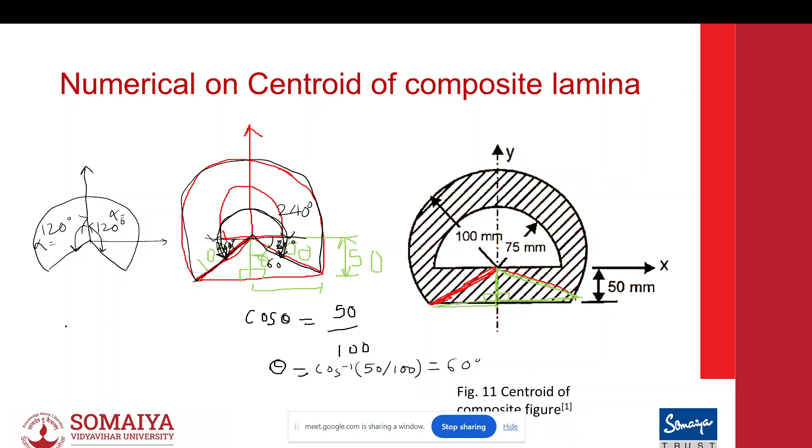So now you go to the notes where we have drawn some basic shapes. You will find a figure like this, which is a sector of circle, which is symmetrical about the x-axis.

What is the area for this sector of circle? R square alpha, where alpha should be in radians. So if we apply the same analogy, this is the sector of circle. What can we find out the area of this?

Let us call this as A1, these two triangles or single triangle as A2, and this as A3. So what we can do: A1 plus A2 minus A3. For that, we need to find out A1.

To find out A1, we need to find out R square alpha. We have the alpha now, 120 degree. And now our R is what? R is the radius, this radius.

Now the big question is, this is a sector of circle which is symmetrical about the x-axis. Can we apply the same analogy here? If it is yes, then we can proceed with the process.

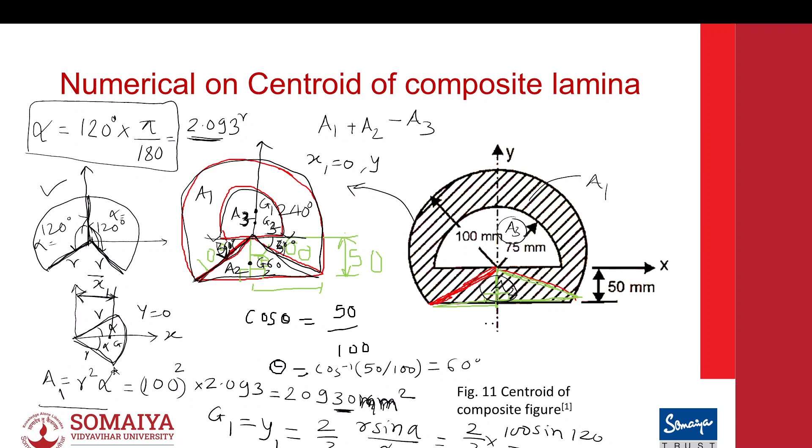Now done, okay, now you draw the table. So in the table, what do you write? Figure, area, xi, yi. Or part, area, right? Then don't write down xi, no need, because xi is symmetrical, so zero. Just write down coordinates in y, and that in mm. And then ai, yi is in square.

Sorry, cube, because ai is in square and yi multiplied will be cube. Area will be square, right? So now first will be sector, right? Second is triangle, A1, A2. And the next one will be semicircle, A3.

Babu? Wait, huh? Yes, please.

Yes, sir, done. Now we can write down the value of area we have got, 20930. Yes, done. Then we can also write down the 27.584 here. Yes, barabar, yi, na? Yi. Now triangle.

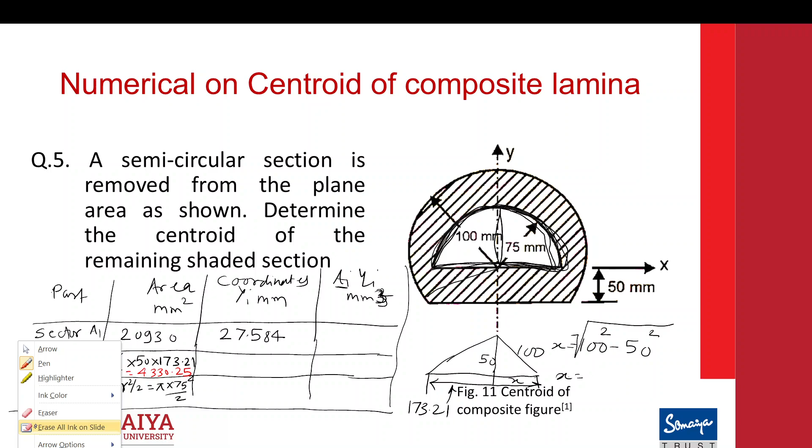Calculator you are using, na? Yes, calculator only. Because I'm using mobile calculator, na, so it might give some higher values. Yeah, barabar, better proceed.

Now coordinates of y1 for triangle, coordinates of y2 for triangle. Okay, now this is the centroid. Yes, barabar, here it is. And the height is 50, na? Okay, so what will be the distance from there to there? Right, barabar, okay.

Triangle, kind of problem. Yeah, wait. My daughter disconnected the charger. She's crying. Don't worry.

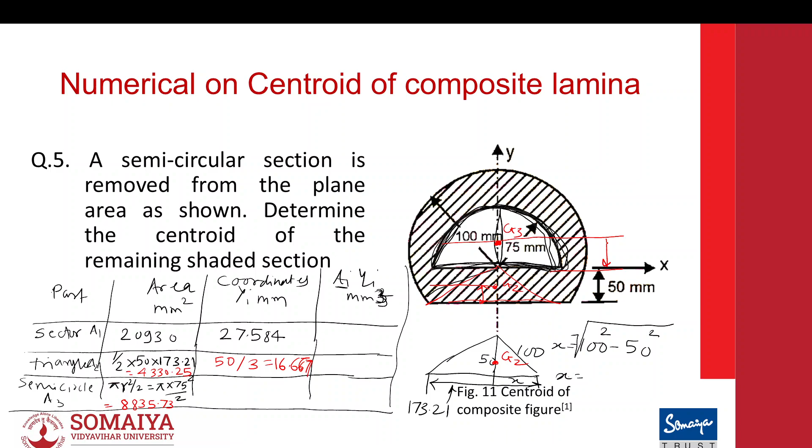4 into r, which is 4r by 3 pi. So r value is... the whole value we are taking now. But tell me, what is r? It should be 100, right sir? No, now we are focusing on the semicircle.

Semicircle, oh right, sorry, 75 then. That's why I have not written it here. 75. So 4 into 75 by 3 into pi, right, 4 into 75 divided by 3 pi.

Wrong. 21. 31.84, plus or minus? Minus. Plus. It's a semicircle right sir, we are minusing, right? But the area we are subtracting.

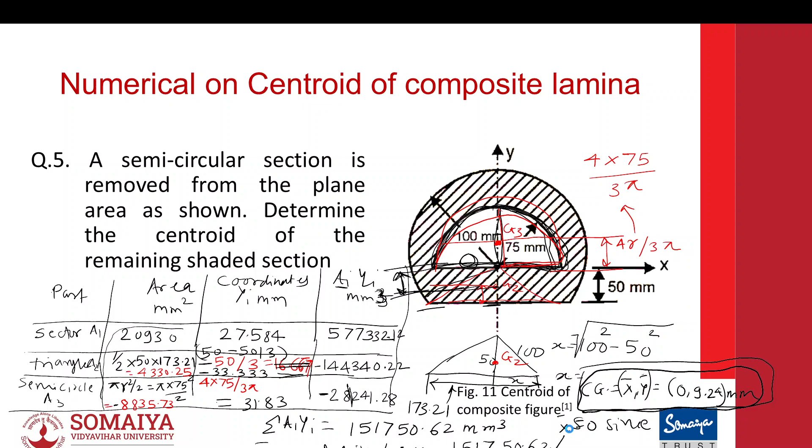Could you find out this figure? Same. Around 140, nearby, because the page numbers could be shifted since I'm using an older version. Yes, ah yes, it's there. There, right? There's one more problem, similar. Can you spot that? Somewhere, I can see it.

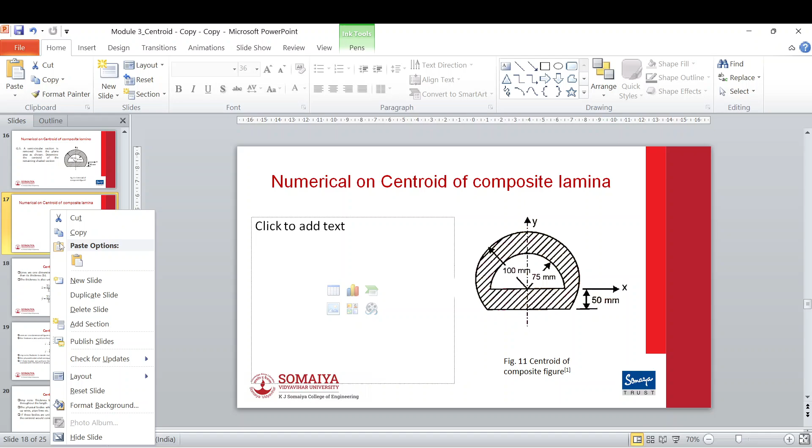It's not there. Huh, there, not there. Nope, the problem number in my book is 6.8. Okay, I will share, wait, I will share. Nope, okay. Because my book could be different, it's probably a 2019 edition.

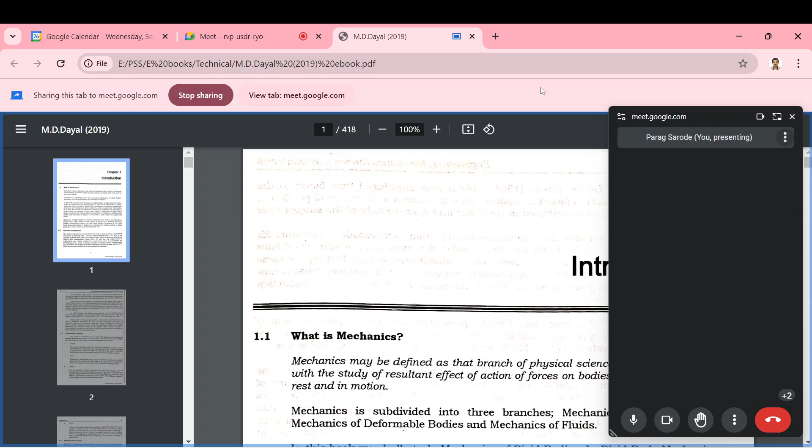Yes. You are saying, Hmm. Uh,

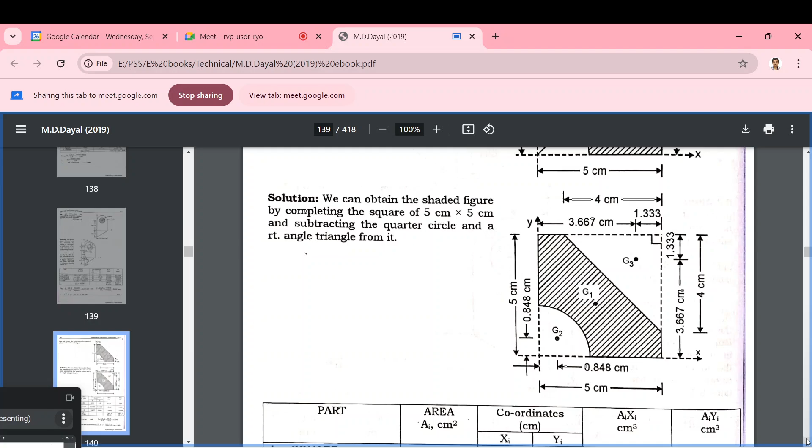Sir, around 7:20, I have got one more lecture of college. Around 7:20 only, you can stop, at 7:10 or 7:05. Okay, okay, I just need to prepare the orientation, that's why. Yes, yes, okay, no problem.

Which lecture? College lecture? Apna college lecture, yes, no worries. Because today college was a holiday, na? I wasn't knowing that it was a holiday, otherwise we would have scheduled in the afternoon. Because all colleges were on holiday today, but our college was not having a holiday, although I didn't go. The Mumbai University had issued guidelines that today was a holiday.

Okay, can you look at this? Can you see the screen? Yes, yes. This problem, wait let me check, it is on page 142.

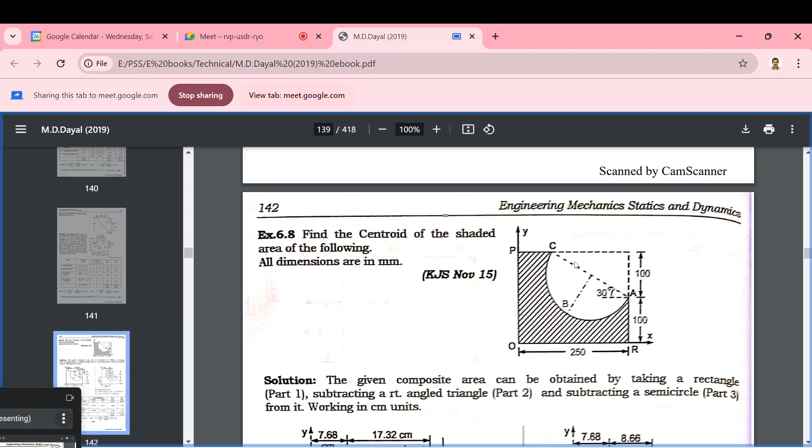No, in my page it's not on 142. No worries, just look at this. We will not go into detail because such a problem may be out of scope for a simple figure, but let us not rule it out because this was our college's problem, so the university is bound to give some surprises.

So if this is the shaded region, this shaded region is composed of what? Like this, 250, and this width is 200. Consider there is one rectangle, right? We wanted to subtract this triangle, right? Yes.

The area of the rectangle and finding the centroid of a rectangle is not an issue, correct? What will be a challenge? What is this, and what is the diameter? If you get this, the diameter is also easy to get, right? You will not get the diameter directly. So how do we get this rectangle, this triangle length?

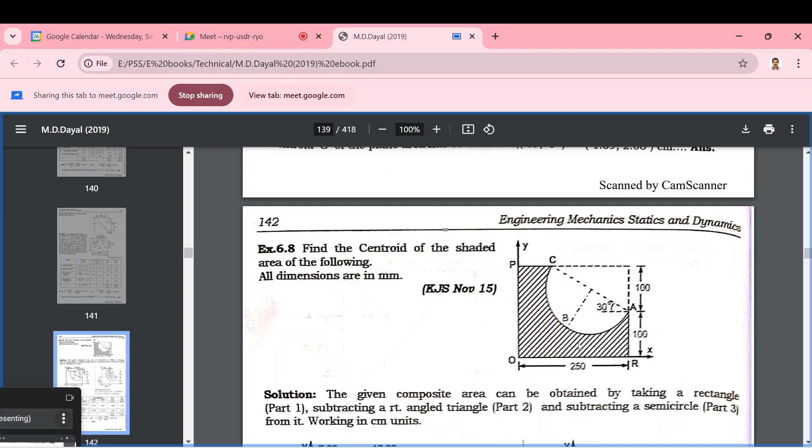Hypotenuse, right? Yes, we can get it using the hypotenuse. Once we get this, what is the value of it? Now I'm sharing my PPT, so we can write it down because it will not be easy to write down on the PDF.

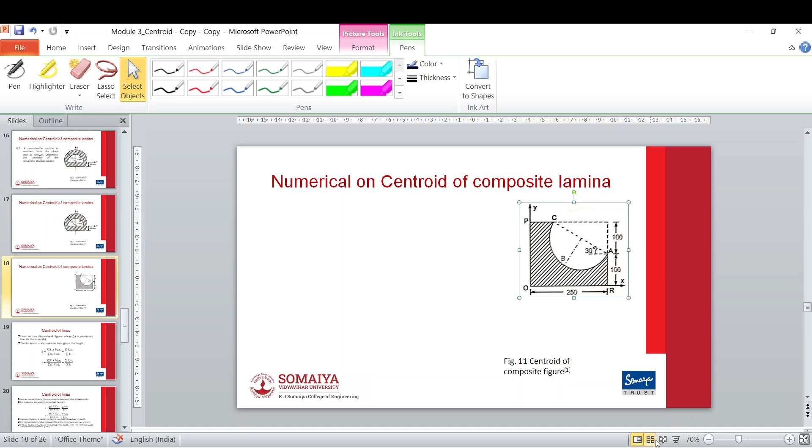Sin 60, wait. So we can use sin 60 to get the opposite side. Yes, we can use sin 60. So sin 60 is equal to, let us call this x by...

We cannot use sin 60 because we don't have the hypotenuse, we wanted to find out the hypotenuse. We have to use tan 60. Tan 60 is equal to x by 100, getting? So it is opposite upon adjacent side, 173.20, the x value.

How can you get more than 50? Not possible. No, I'm getting 173. Ah, okay, okay, it's possible, yes, 100 into tan 60, 173.205, yes.

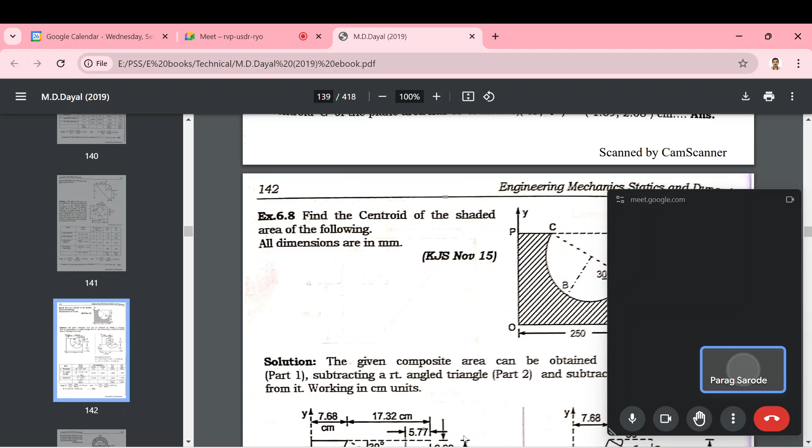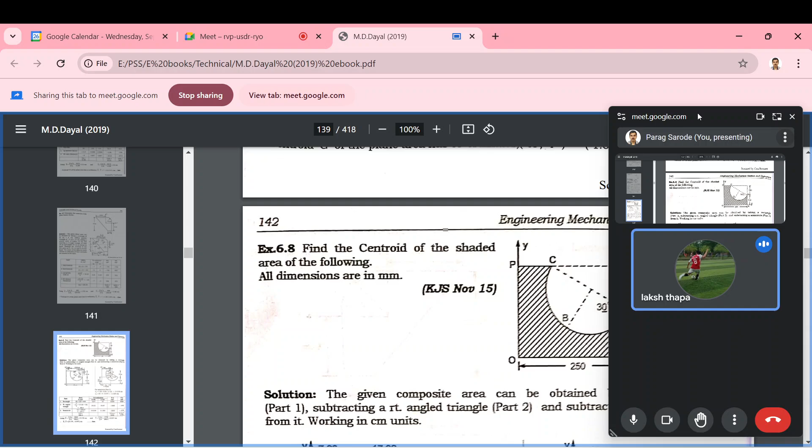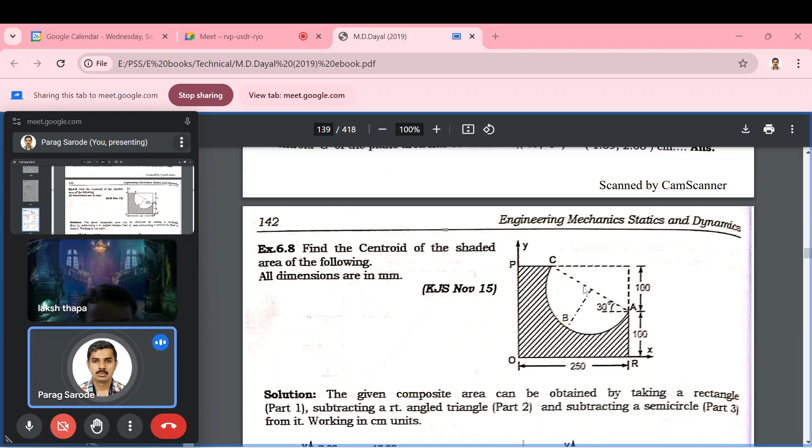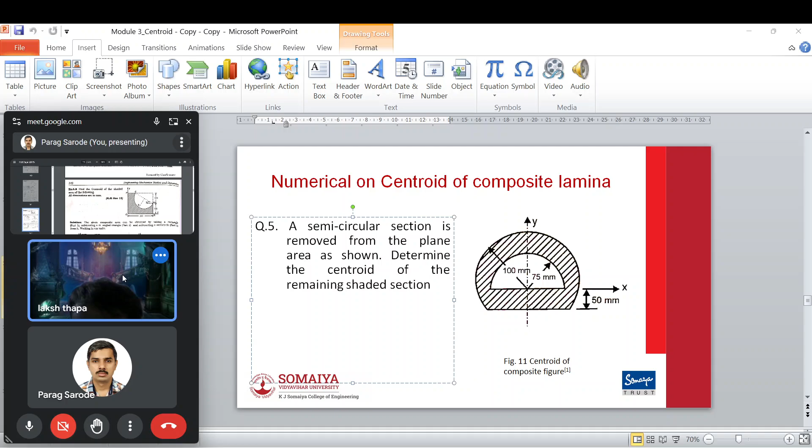Draw this diagram. Okay, I'm sharing the book. Getting what we were trying to find out? You're presenting once again, okay. Just a second, I'm coming from washroom, sir. Yes, please.

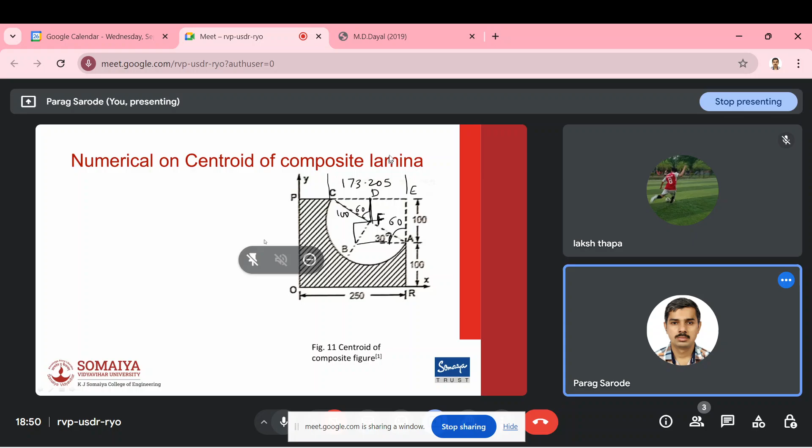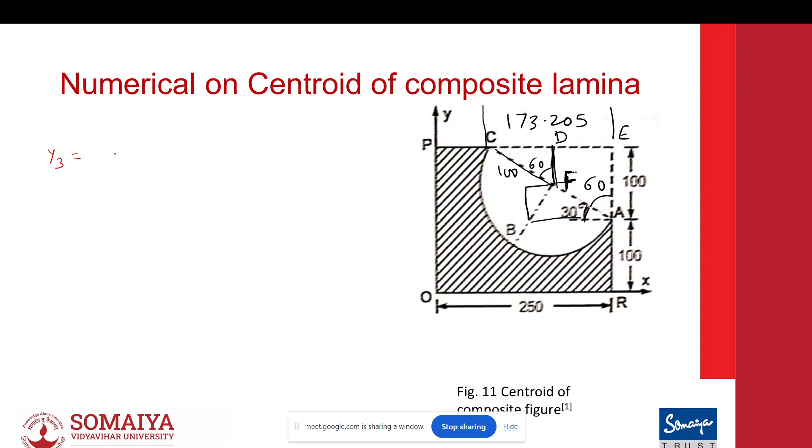So we wanted to find out this here, what we have written earlier. We wanted to find out the value of y3, right? So y3 value was 200, not 250, minus this. See, this is 100, this angle is 60, cos 60 is equal to DF divided by 100, right? So we would have easily got 100 cos 60 is equal to DF.

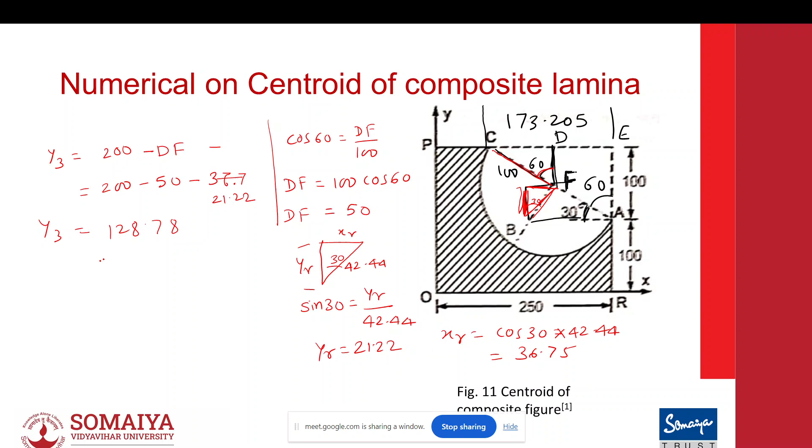Get it as 21.2, correct? And this is the final value of y3: 200 minus 50 minus 21.22, 128.78. So at these three values, I think we got the x3 value, 142.175.

So this was the tricky task. Tricky, sir, it was among God tier question. It's a full question to be solved. Yes, correct. I doubt if any of the students tried to solve this whole correctly.

Now you can construct that table and then you can write down this A1, A2, and A3. Consider this rectangle as A1. A1 is rectangle minus triangle A2 minus semicircle A3. And then again find out the area for the semicircle and triangle. That's not a difficult task, that will be easy, I can do that.

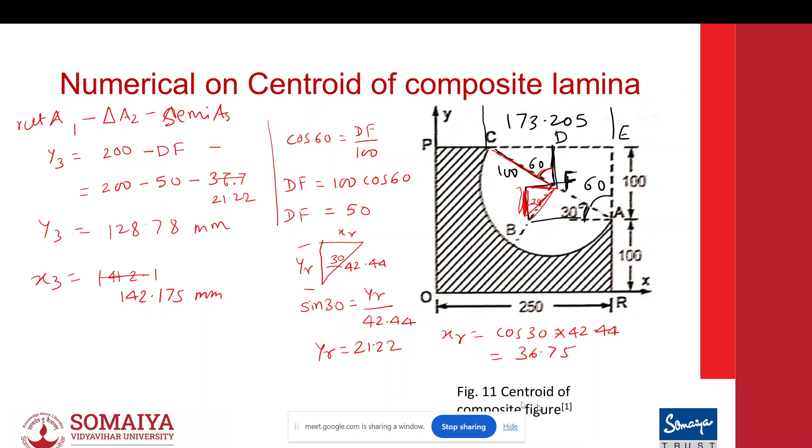Now are you going to teach a new topic, sir, or what? Just to introduce a new topic. Sir, just introduce the topic. Okay, so I'm stopped, you can find out the answer later. You're sharing or what? No, I'm sharing, wait.

So equilibrium. In this equilibrium, we are supposed to understand equilibrium of system, types of supports, and loads. Also equations need to be solved in this module only, so comparatively a large topic. So there are certain outcomes I have written. We should be able to draw the free body diagram, then also need to calculate support reaction.

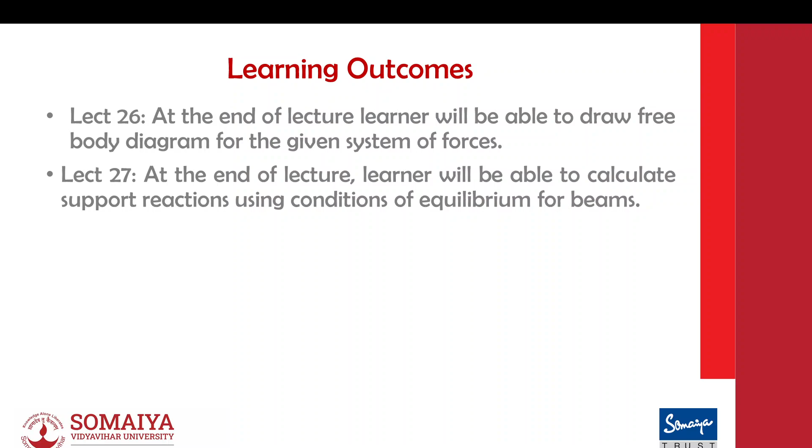Currently you won't understand anything. What do you mean by free body diagram? What do you mean by support reaction? Then what is an example of this equilibrium? A lamp hanging from a ceiling is an example of concurrent force system in equilibrium. So what does that mean? If we take a lamp... oh, how to write down on screen. Let us say a lamp hanging from a ceiling, from two ropes. What does two ropes mean? Two ropes, yeah okay, so it will be an example of concurrent force system.

You have two ropes, just copy the movements of the mouse. This is one, this is another. At the junction of these two ropes, there is one more rope below which a lamp is hanging.

So that will be one node. Moving the mouse, just observe. This is another, this is third one, right? So below is the lamp. That will be a case of concurrent force system in equilibrium.

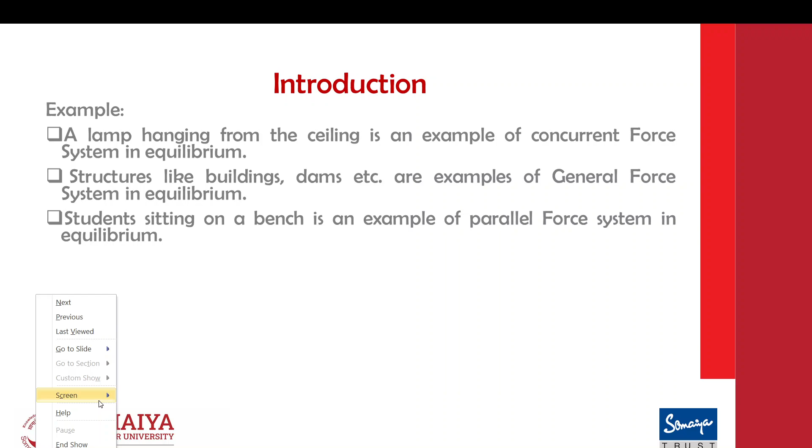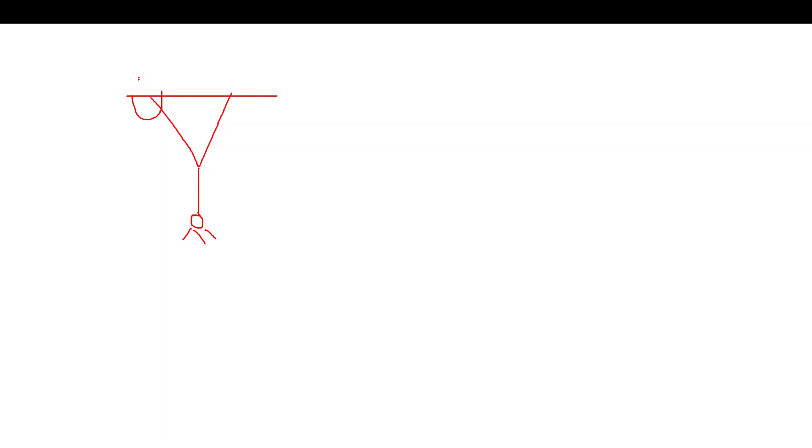Now if I go to the white screen, I'm drawing here like this. This is the supposed lamp. Or we can say this lamp is independently attached here and this is independently attached here, somewhere else, somewhere like this.

So the tension could be different, T1 and T2, right? And here it is acting the weight of the lamp. So in this case, we should separate like this. This is the case of concurrent force system, right? So that is what is called as equilibrium of concurrent force system.

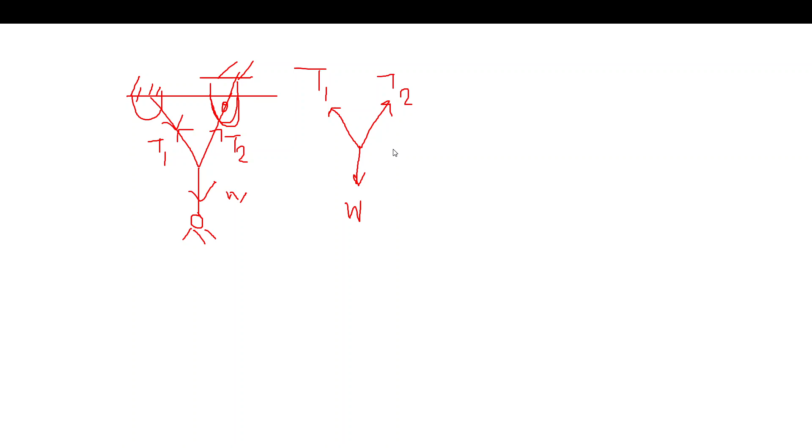Another case, structures like buildings and dams are examples of general force system, because for buildings, three dimensional, all types of forces will come. It could be parallel, it could be inclined, something like this. It's a case of general force system in equilibrium.

What do you mean by equilibrium? Body is at state of rest. Body in a state of rest means all the forces acting vertically downward will be balanced by the forces which are exactly equal and opposite to all forces, so that the building remains steady at rest.

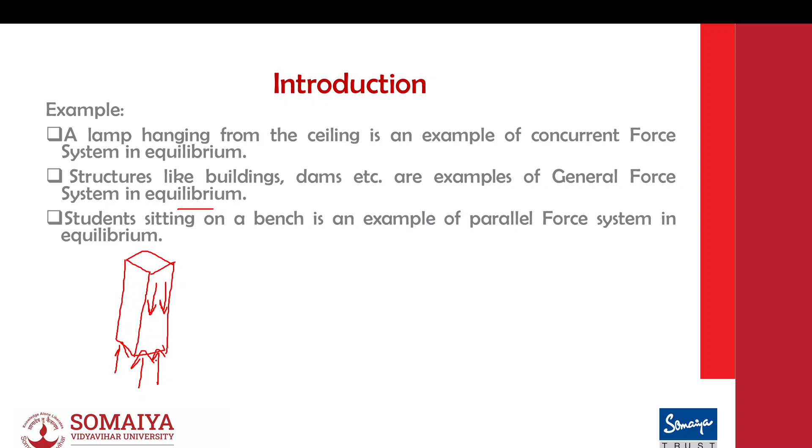Similarly, you are sitting on a bench is an example of parallel force system. This is a bench, right? You are sitting here. So whatever is the force you are offering, particularly downward, same will be the force offered by the surface over which the bench is kept.

So it's the case of parallel forces. This is acting downward on the bench, right? This is reactive, acting upward. This is the case of equilibrium, or equilibrium of parallel forces.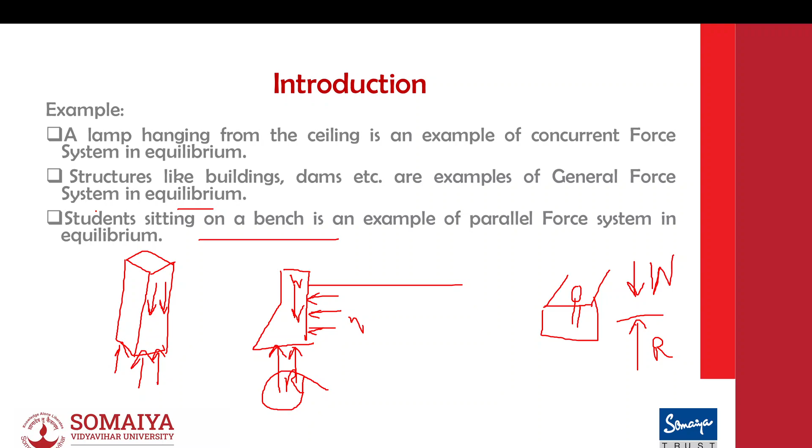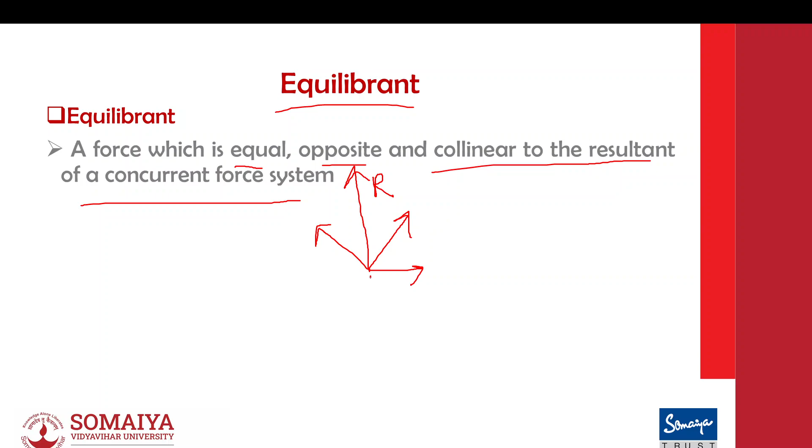So now let us understand the term which is called equilibrant. What is equilibrant? I think we earlier studied this - a force which is equal, opposite, and collinear to the resultant of a concurrent force system. So this is the concurrent force system whose resultant is suppose R. What is equilibrant? It is equal, opposite, and collinear.

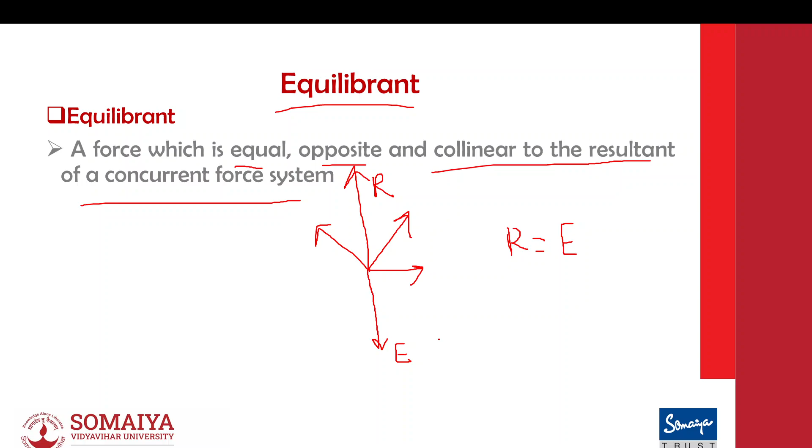Now, whenever we are saying equilibria, that is the equilibrium state of a system, what are the different stages we are considering? We are considering the stable equilibrium. Stable equilibrium is nothing but a state of static equilibrium. What is static equilibrium? Suppose if we keep a ball on a table, it will be a static equilibrium state.

Now, if we give some additional displacement to this given ball or body, then what is the natural tendency of the body? To regain its original state. So we can say that for any body, it will try to restore its original stable equilibrium state.

Now let us look at unstable equilibrium. A body in unstable equilibrium is in the state of static equilibrium, and an additional force is attached which will give a slight displacement and which will try to push away the position of the body, but the body does not regain its original shape.

Sorry, not original shape, but original position. It is getting displaced by a force to a new state. That is called unstable equilibrium.

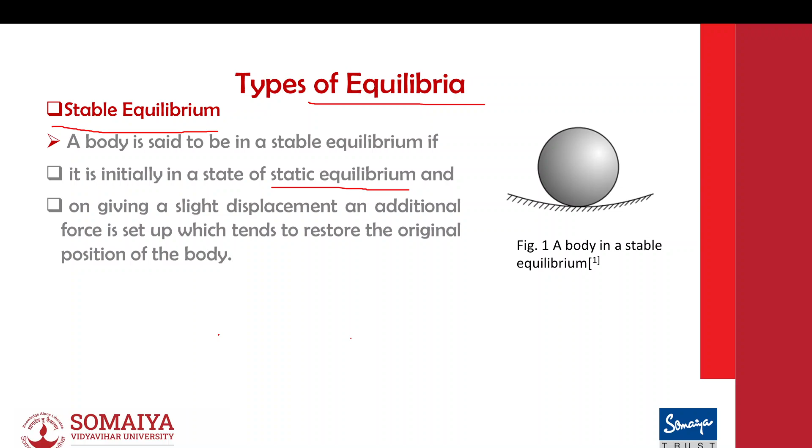Now, again go back to the static equilibrium. The body is given a displacement because of the additional force, and it will try to restore to the original position - so body retains original position: stable. Body does not retain original position: unstable. And body gains a new position but no additional force is given - that's neutral.

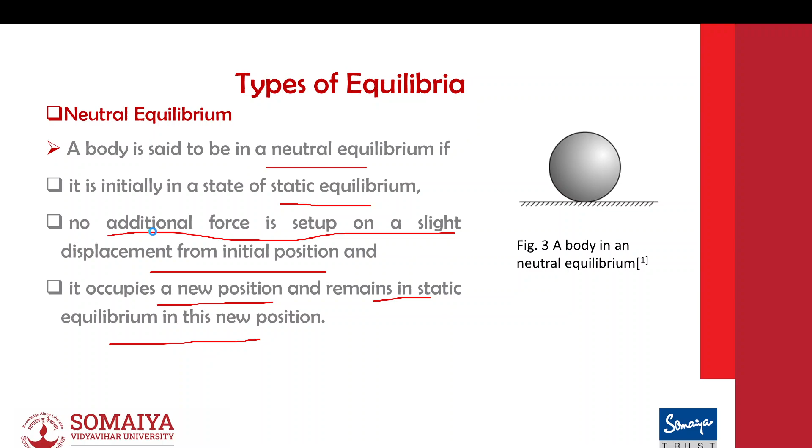Sum of all forces in the x direction is zero. Sum of all forces in the y direction is zero. Sum of all moments of all forces is zero. A body is said to be in equilibrium if it is in the state of rest or motion, based on Newton's first law.

Correct, so this is the case. The conditions given are based on Newton's first law of motion.

Summation Fx equals zero, summation Fy equals zero, summation M equals zero - these are the three conditions. A body is said to be in equilibrium when it is in the state of rest or motion, and the resultant of the system is zero.

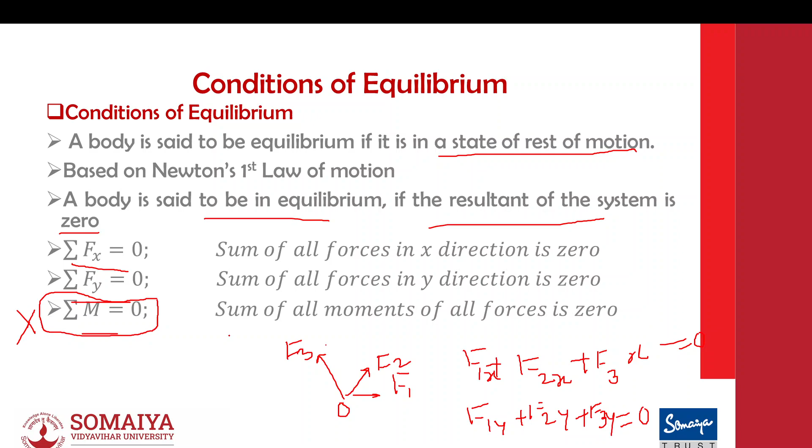And what will be the moment? Obviously, it will be zero because it's a case of a concurrent force system, so the moment equation will not at all apply here - it is not required or not applied. For a concurrent force system, this summation M equals zero is not required to be applied. Get it?